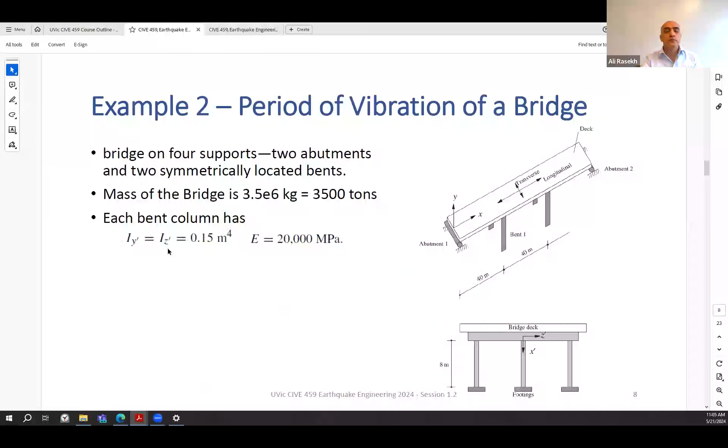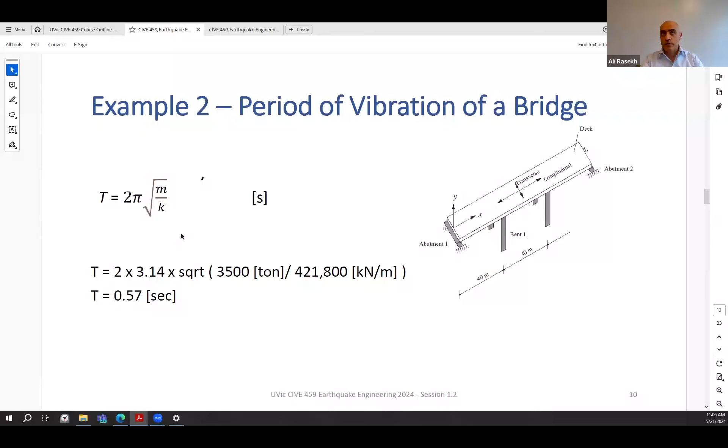Yeah, last Friday we were working our way through some examples here, and I go to almost where we left off. We went through quite a few good examples on estimating stiffnesses and masses of the system and coming up with the period of vibration of the system, such as a bridge here. We did very good examples here to review our general knowledge of dynamic characteristics of the system.

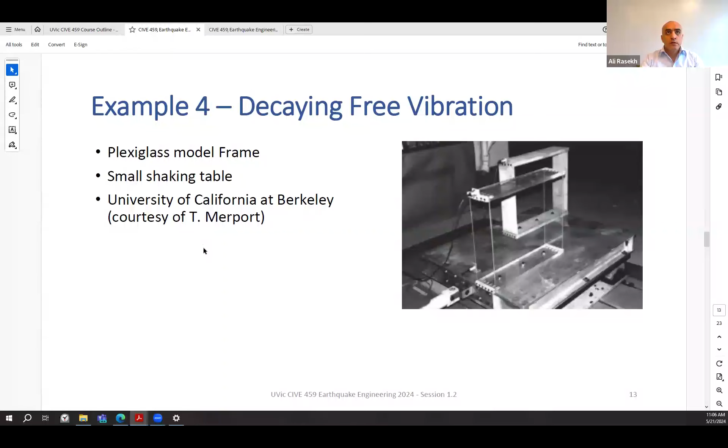And we checked decaying. Let me put this microphone here. Sorry, slightly different setup here because I'm at the office.

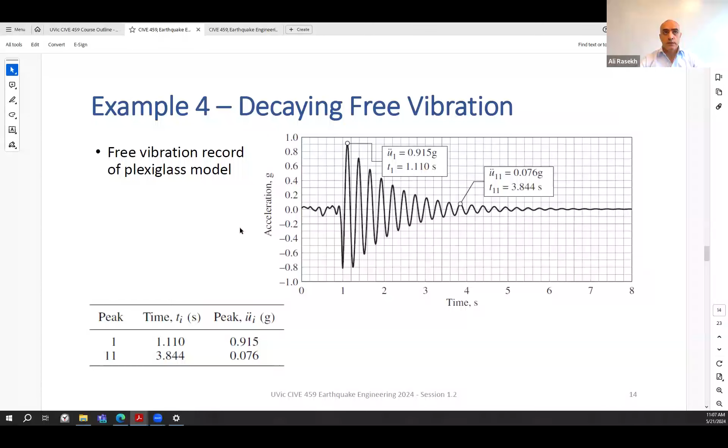Okay, so we discussed the decaying free vibration, and we could estimate very quickly. That was a nice and quick way of checking the period of the system and damping of the system. And we went through the steps, and period was just seeing how many vibrations we had and in how long a time, and the ratio was the period of the system

estimated at 0.273 seconds. And for damping, we had this solution that I previously introduced to you based on the logarithm of the change in amplitude. In this case, we have acceleration amplitude. Similarly, we could do it with deflection amplitude. And the change in acceleration amplitude, that ratio, we could use it to assess the damping of the system.

Now we want to use a slightly more advanced solution, which a lot of times results in a more accurate estimate of the damping of the system. We previously introduced this method. It's called the half power bandwidth. Again, this is a shaking table, so this is like an experiment in a way on this particular type of structure and material. Material is plexiglass and the frame is built out of it.

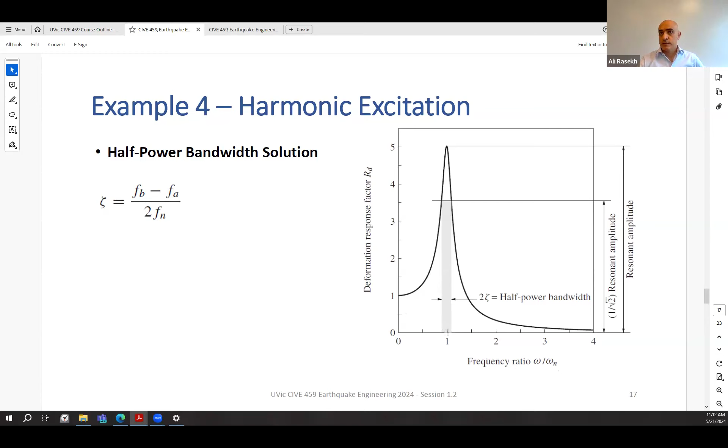So in this plot, the frequency is normalized with respect to natural frequency. Therefore, the middle point is 1, where frequency is the natural frequency. But you could also not normalize it, and that leads to the same outcome in a way.

So going through the exercise, the highest amplitude was 12.8 for the acceleration ratio, and divided by square root of 2, we got 9.05, the other straight line, and we have FA 3.44 hertz, FB 3.74 hertz, and the maximum, which might not be exactly the average, is 3.59. And therefore, we can estimate the damping: the difference between the upper value, FB, and lower value, FA, divided by twice the natural frequency. It gave us an estimate of 4.2% for damping ratio.

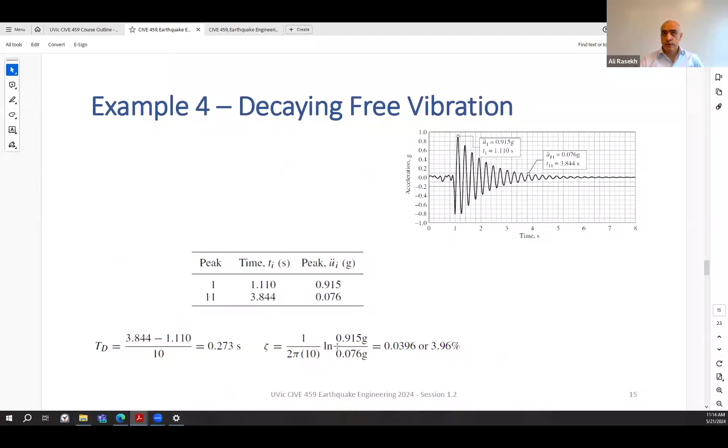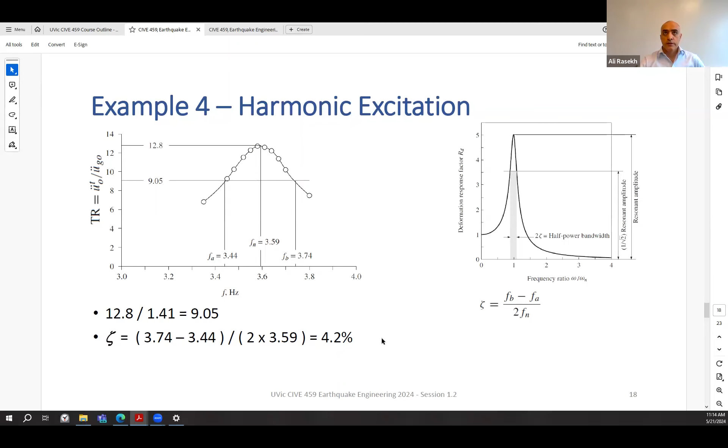So the previous estimate, how much was that with a simpler solution? We got 3.96, almost 4. And now with a more accurate solution, we are getting 4.2. So they are kind of in agreement with each other. However, the second solution is considered a better solution. And as I previously told you, this solution is applicable both to numerical studies and to experimental studies, such as what I showed here. That's about the half power bandwidth.

Second of inertia. A second, I should admit one more person.

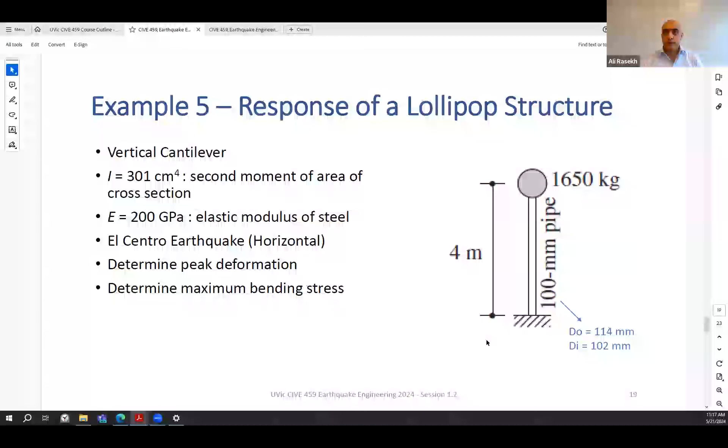Going to the next page. Again, this is a kind of equation you can find on the internet or ChatGPT, but you should generally be aware of it and be able to verify the correctness. So when you have a cantilevered beam, the coefficient is 3, but if you have a column which is prevented from rotation both at the bottom and top, it becomes stiffer, and the coefficient, I believe, is about 12. You should generally have the knowledge and know the resources, but sometimes when we are forgetful, you are welcome to use the searches.

And so the stiffness of such a column is directly related to elastic modulus and the thickness of the shape. However, when your length increases, the stiffness reduces. That's also some kind of engineering judgment. You can even feel that a longer column should be softer for lateral deflections. Going through the calculations, the stiffness in terms of force divided by deflection is about 28,000 newtons per meter, or 28 kilonewtons per meter.

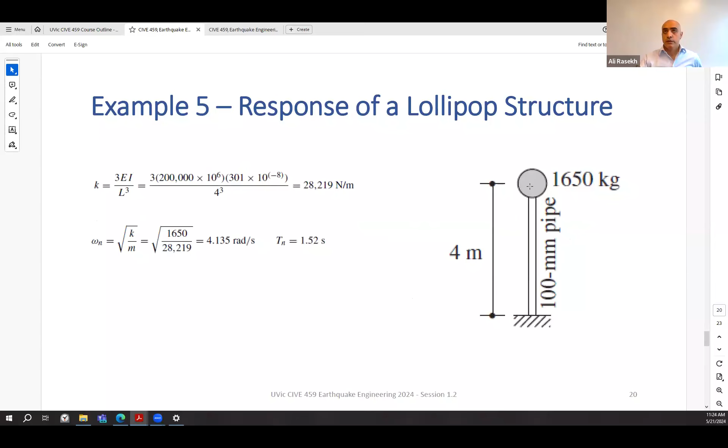One example is that if there are two structures side by side, we don't want them to hit each other. And we also don't want the structures to deflect too much, as it might cause lack of stability. Now, as I said, we have the peak acceleration in terms of g. So we multiply it by g, and we multiply by mass, and we get the maximum lateral inertia force that this structure will be experiencing during the El Centro earthquake: 3.5 kilonewtons.

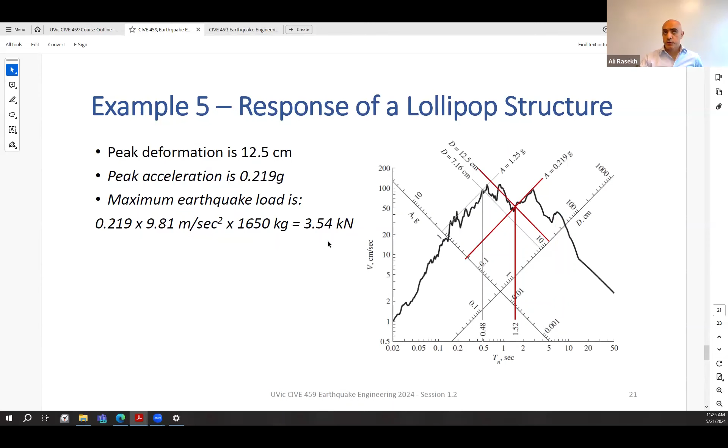Now again, back to the structure, 3.5 kilonewtons was the estimate of the load applied to the mass, because in an earthquake the mass actually sees the load, because earthquake is acceleration and it causes inertial forces in the mass. So the maximum force applied to this mass at the roof level, or tanker level, is 3.54 kilonewtons. And with your structural analysis calculation, you can obtain the maximum moment at the base, force multiplied by the arm, 14.2 kilonewton meters, and you can obtain the bending stress.

This is again from the structural analysis courses you previously had: for a circular section, or any section basically, if you have the I and the maximum distance to the edge, in this case the radius, you can calculate the maximum stress. So the maximum stress that this steel pipe will experience during the earthquake would be about 270 megapascals, which could be used in the design checks, comparing with the steel capacity.

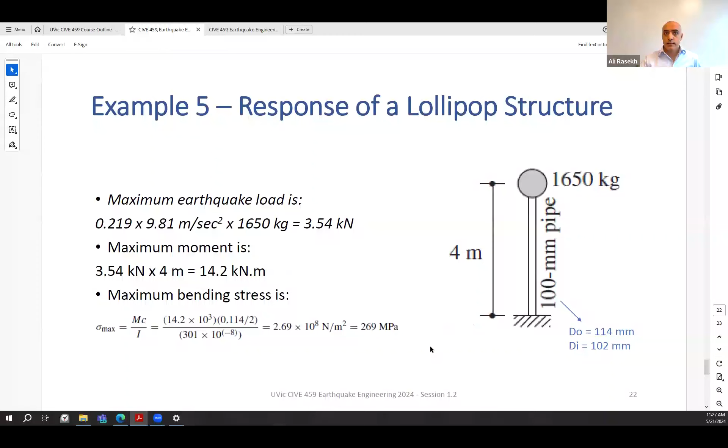And all different types of steel have the same elastic modulus, but they have different yielding stresses. This could be probably okay, or close to okay, for some of the building steels. You should also look at your specs. But it doesn't look like too huge a number. A steel from your steel book is probably about 350, but this could be even higher strength. So it looks like a pass. Any questions on this slideshow?

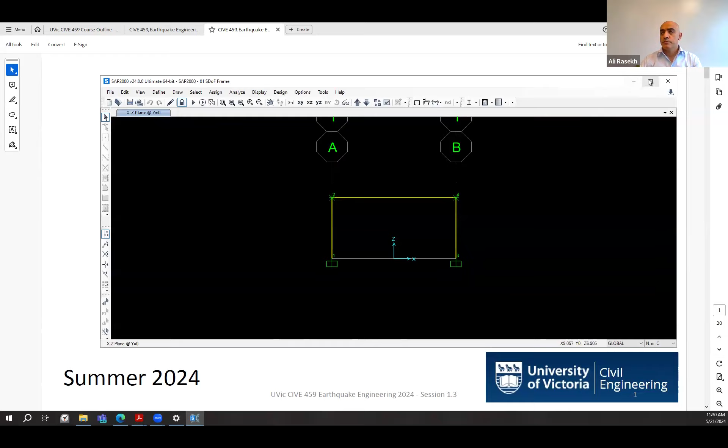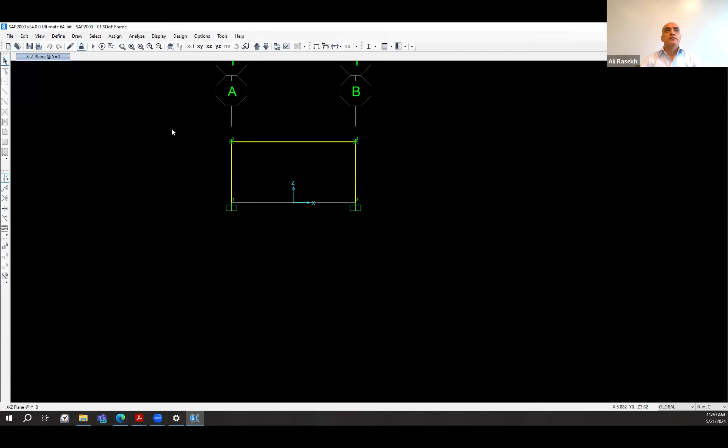Yeah. Opened. So we have a SAP 2000 model. Generally, I'm hoping that you guys have some experience with SAP 2000, but it's one of the best softwares for self-learning. Even sometimes I don't use a feature for a long time and I want to relearn it. Excellent videos and YouTube links and knowledge base links that explain everything. So I'm not seeing any issues with learning the software and using it. However, we go through a dynamic case in this session.

SAP 2000, single degree of freedom. Yeah, the SAP 2000 model is what I just showed to you. It's basically a one-story frame with a height of 3 meters and length of 6 meters. It's like a portal frame, as we call it. And I have listed a few important tasks when you create a model. Be aware of your material and section. Material means that you have used a steel, and section means what section steel profile from your steel book or from the vendor, etc. You should know what the profile is.

In the last case we just discussed, it was a tube, like a hollow tube. So you should define your section as well, because most of our work is based on the frame assumption, meaning that the finite element solution doesn't discretize the section; the frame should be defined by its section, which is an excellent solution and very efficient for our type of work. Build geometry, meaning at a high level, what is the geometry? We have a 6 meter by 3 meter geometry.

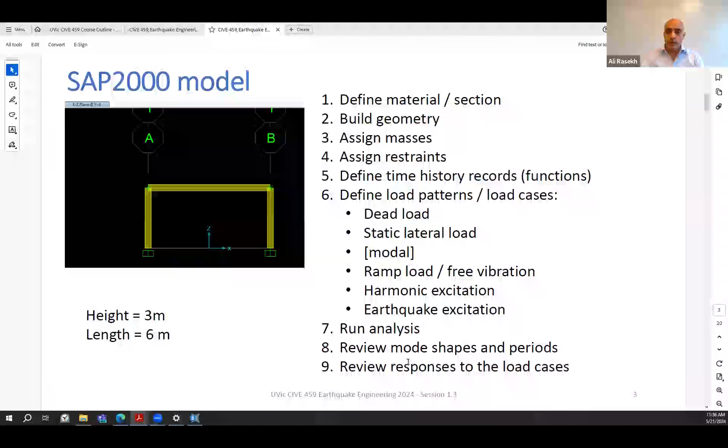So, as I said, sometimes we trivialize it, but it's very important that the material and sections be checked and double checked, like two independent people look at them, because if they are not correct, you cannot trust the outcome. The material was, if I can read it correctly, steel with a yield of 50 KSI. 50 KSI is almost the same as 350 megapascal. So that's the material that is used.

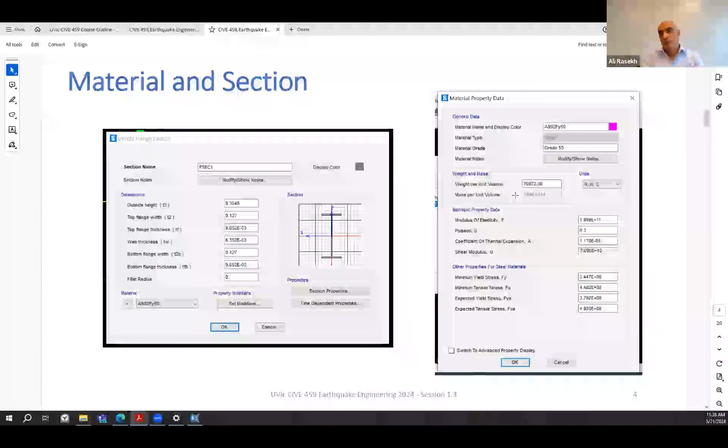However, we are not going nonlinear, so specifying the yield is not super important. But we have the awareness that most of the steel that we use is grade 50, which means that the yield is 50 KSI. And if you change the units from imperial to SI, which is, at least academically, more practiced in Canada, then you get about 350.

For industry, generally it's good to know both of them and be able to switch between the two, because in Canada there are still some imperial units, like the grade of this steel is called 50, which means 50 KSI. And because we all live very close to the US border, there is a high possibility that we work on US projects as well. But it's trivial. Therefore, I recommend reporting in the standard SI definitely, but be able to understand the other unit system as well, imperial.

Unit weight in terms of kilograms per cubic meter is about 7,850, which is correct. And I'm looking at the biggest screen, but looks like the resolution is not perfect. So maybe next time I just keep it on my laptop screen.

Modulus of elasticity, again, as we said, 200 gigapascals, so about 2E11 for any type of steel. Poisson's ratio is given there, which is probably not used for our work, but it's in there. Thermal expansion, we are not using it. Yield stress, as I said, after changing to SI units is about 350 megapascal or 3.5E8.

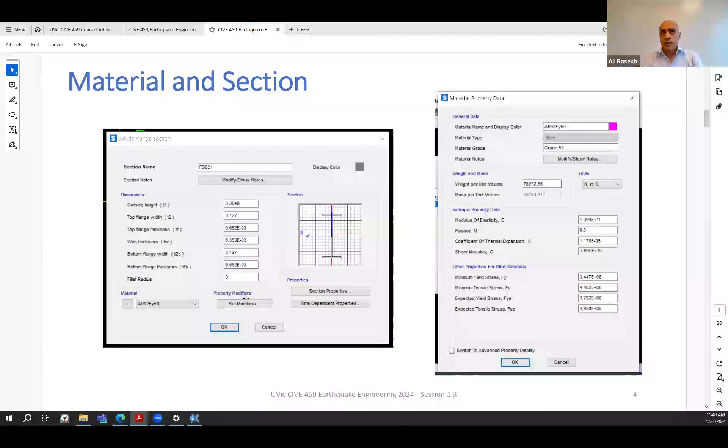Then we have this section, I section or W section, which is built up out of this material, steel, and all the dimensions are here. It says the material is grade 50, which was defined on this side. And you can have modifiers applied to it, but it would be more hidden. I don't suggest using hidden stuff that couldn't be double checked because it causes issues. Normally there's a table in most software where you can import the standard profiles. So probably that's what has happened in this case as well.

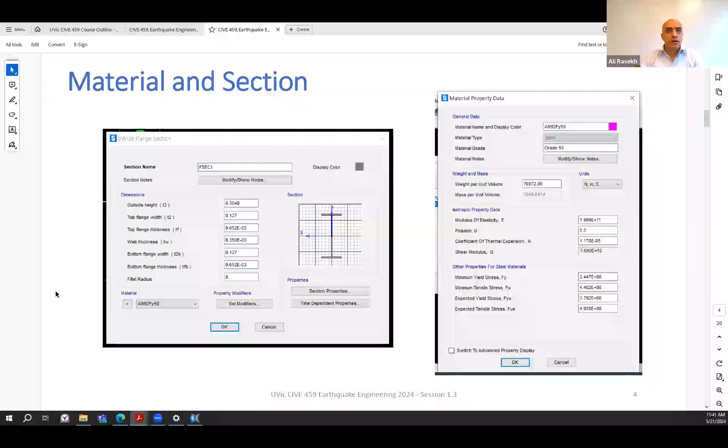And going to the model, if I can still find my way here, it's normally under define. You can define the material and sections. So we go to material, jumped into my other screen. And this is the grade 50 steel that we were looking at. So jumping to the other screen. So everything that I was showing to you is implemented in the model, and you have access to the model. You can scrutinize it.

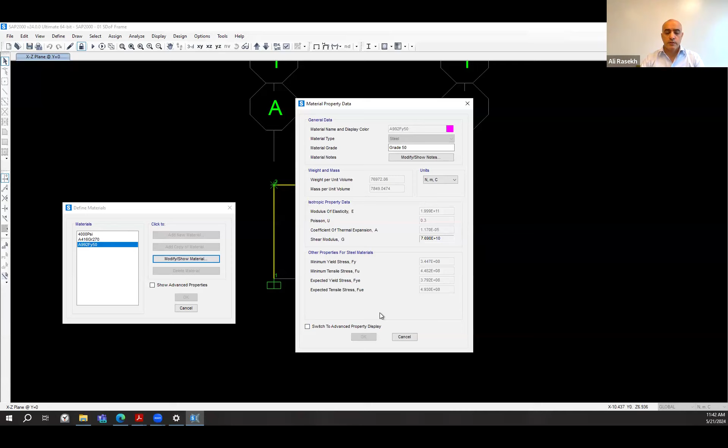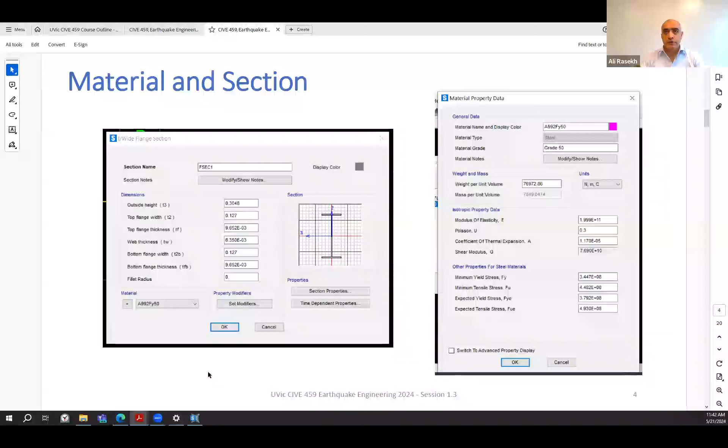Going back to the slideshow. So very, very important, always throughout your career, check the material properties and use the correct value for your project. Be very careful with your assumptions. Mass: it appears that in this case the nodal mass is applied, 20 tons total, so 10 tons on each node. That was the floor mass, which was probably concentrated there, and floor mass is a lot greater than the member mass.

So the program is showing it as directional mass because the program is capable of, for certain purposes, having only horizontal mass or only vertical mass, but generally for most cases, the mass should be identical in all directions, as in the physics of the phenomena. All masses are the same in all directions. Sometimes for computational purposes, you only want to apply it in a certain direction.

Okay, going back to the model. Sometimes you can right click. Okay. Bring it back. See everything assigned to every node. And as you see, the mass is in 3 directions and 10 tons in each direction. The unit is shown here, Newton and meter, and probably centigrade for thermal. Newton and meter correlates with kilograms, so the mass is in kilograms.

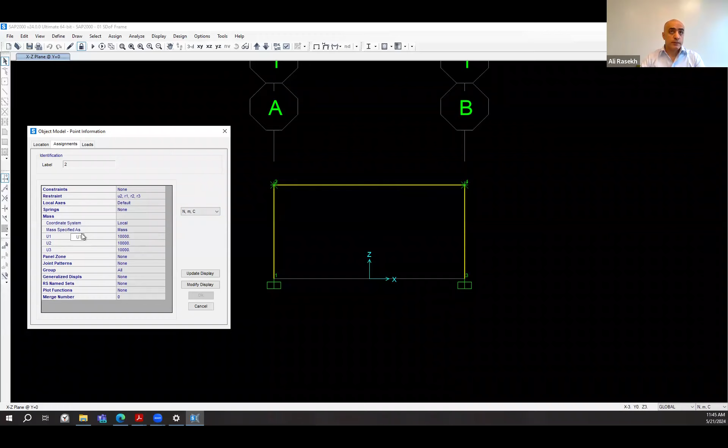Anyways, as I promised, I wanted to just slightly walk you through this SAP 2000 example, although there are very good resources on the internet. For many years, SAP 2000 has been the most important tool for structural engineers. So I highly recommend that you have some proficiency with this software.

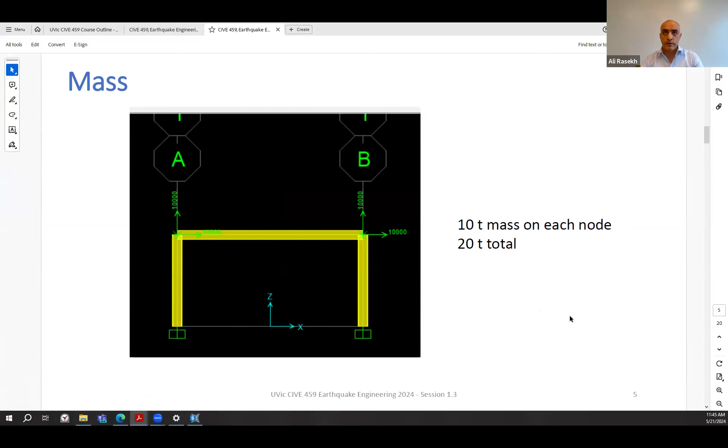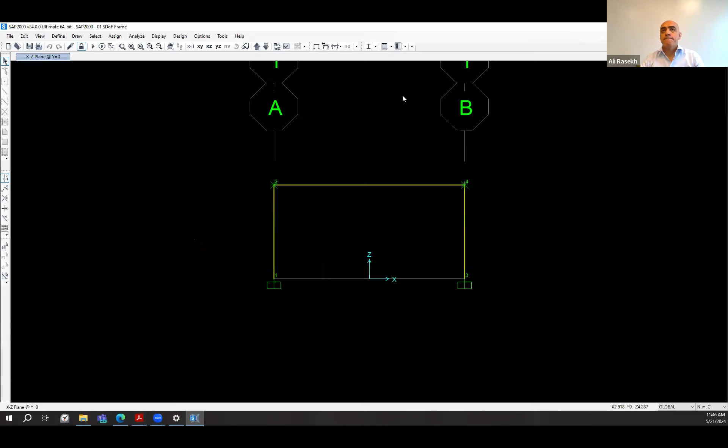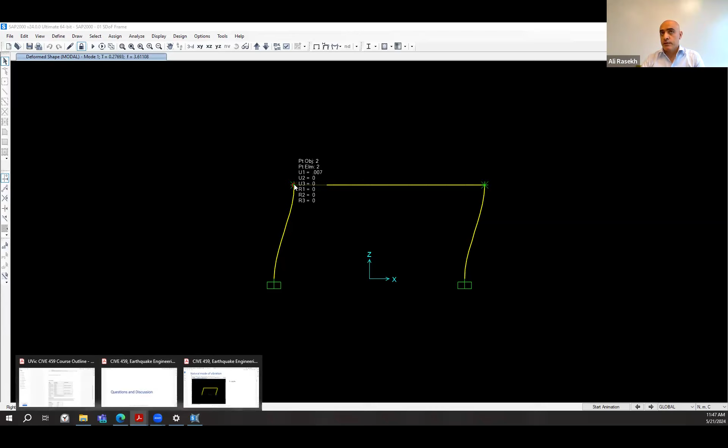As you saw, we didn't allow any rotation at this point or this point, which again should replicate the physical reality of the system. This was intended for a slab system or roof system, which is very rigid and doesn't really allow any deformation or rotation in the beam. But you can play with this, modify the restraint here so that rotation is allowed, then you will obtain a different frequency and different period, which is a good thing to play with.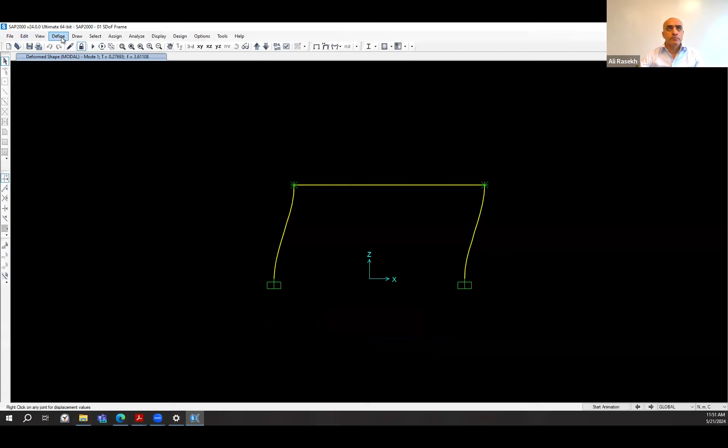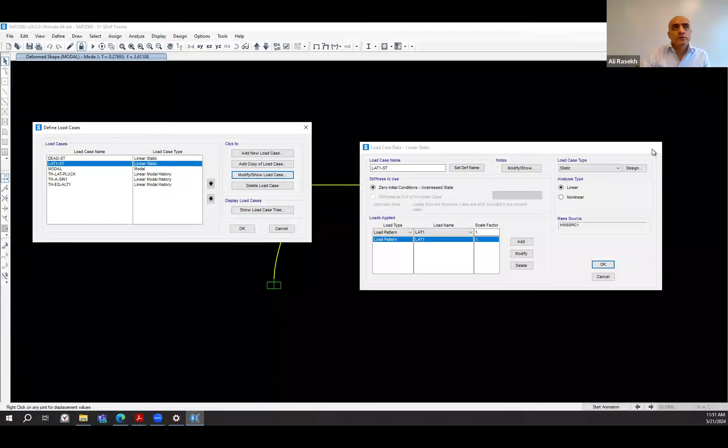Let me see if I can pull it up in the real model. Didn't we say load case? In the different load cases, we discussed probably this one, lateral load. And modify/show. Almost what we were seeing there. And this is a static one. No, we want one of the time history ones. So forget about this one. That's lateral under static. Lateral under dynamic is this one.

Yeah, exactly the same as those screenshots. And we already discussed a lot of these things. Mass source is mentioned here. Just pretty much every mass in the system should be used.

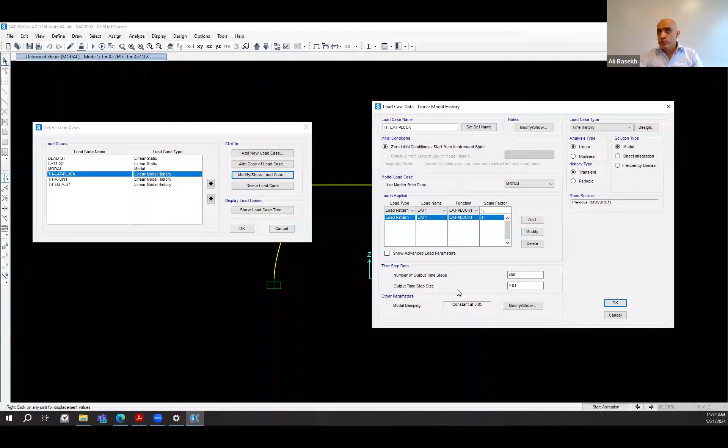Output time step is different than the time stepping for analysis. So for the analysis duration, we have said use 400 steps. That's the way SAP2000 works, that we should tell it the number of total steps. But sometimes in some other programs, we say we want this duration, and the time step should be, say, 0.01 or 0.001.

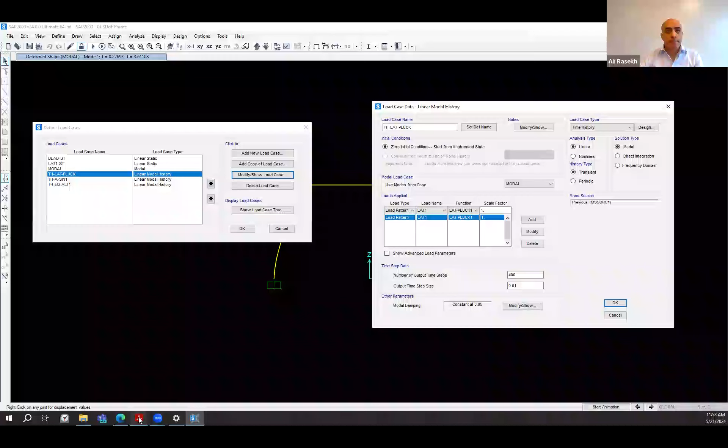Here, maybe something that I missed is the damping. So we have defined a constant modal damping of 5% on the system. So we are dictating 5% damping. Back to the slideshow.

Now, what are the outcomes? We can see those outputs from the model. This first plot is the displacement. This is when we were loading it, and then we removed loading and allowed it to vibrate and gradually damp out. So obviously the deflection is reducing and the energy in the system is dissipating. We have dictated 5% damping.

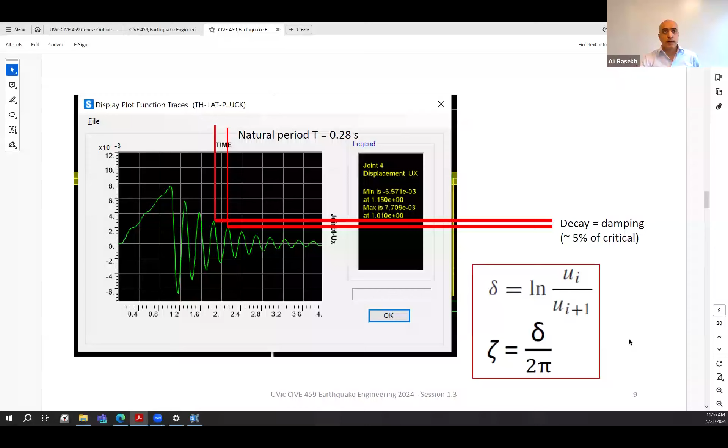And going through these steps should also give us a number very close to 5%. In this case it's trivial because we dictated 5% damping, so it should be no surprise. But it's a good exercise just to see you specified 5% damping and you can calculate 5% damping.

Okay, other questions? Not in the chat room. As I said, always feel free to open your mic and ask questions.

So a harmonic excitation exercise was also performed. Again, a time history function was defined, which is basically a sinusoidal load with a scale factor of 4. And most of the other specifications remain the same. The damping ratio remained 5%. Time stepping is also the same, but this is a longer analysis, therefore more time steps.

And the function that is mentioned here is defined as a sinusoidal function with a maximum of 1. I cannot see the period or the frequency of the forcing function. So it starts from 0, goes to 1 in 0.25. Oh, sorry. I cannot guess, but we can see what the frequency is.

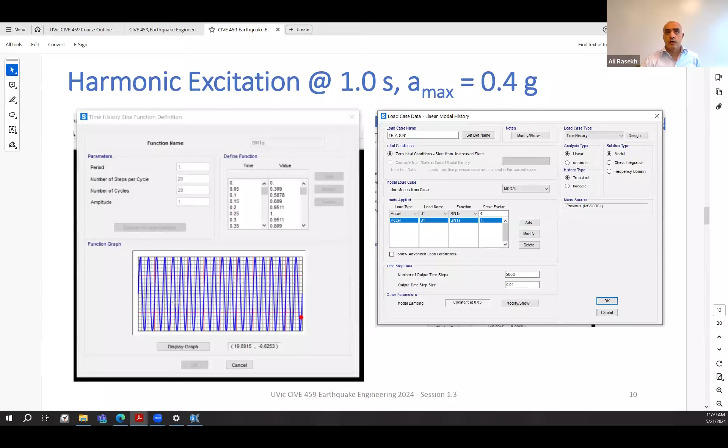Again, we apply that excitation on the system with a maximum value of 0.4 g, and the program is able to output the pseudo spectral acceleration as if this is an earthquake, but a very unusual earthquake, which is harmonic. So harmonic excitation can also have a pseudo spectral acceleration, but it has a very regular form.

And as we expected, this is a good exercise in getting the pseudo acceleration, because unlike an earthquake, where you have a lot of zigzags and ups and downs, you only have one peak exactly at the period of the system, which was 1. That's where the maximum excitation happens, the resonance happens. The program can produce that for different damping ratios. The lower the damping ratio, the higher the resonance. Everything as expected.

And versus, if I'm not wrong, the one on the right is the spectral curve for, okay, no, I almost forgot from last year. So the program allows you to zoom in on a certain location. So I zoomed in and I took the screenshot here. And so this is basically just focusing on this area.

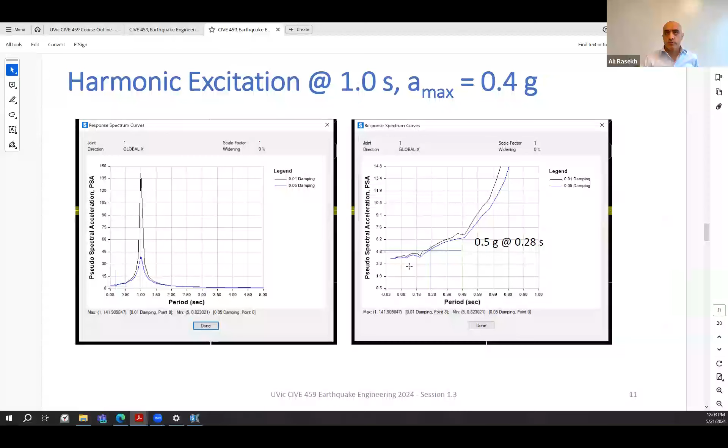Also, you can observe the maximum displacement, which is 10 millimeters. You can get it from the time history output. So basically, in a way, you verified the response spectrum solution. Use the response spectrum solution to get an estimate, but also read the results from the program.

Now, the most important solution that we will be using a lot, or maybe you will be using in your project as well, is using the real earthquake. So the real earthquake is also added there. If you see an error message there, this is an earthquake from the default SAP2000 records. Then you can point it to the folder in your SAP2000 where all the records are kept, and you can find that record, which is EQALT1, if you want to exactly repeat what we have here.

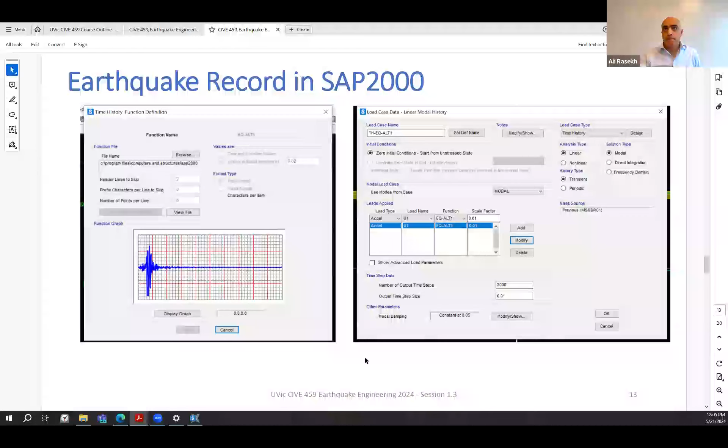Yeah, so I have included the typical data file. I expect you guys to just open it and look at it as well. Some digits showing the specifications of the earthquake. However, you know that the earthquake record is in 8 columns. You can see that. And the time step should be mentioned on top, which is 0.01 second. The unit, which is centimeters per second squared. So you should be aware of that.

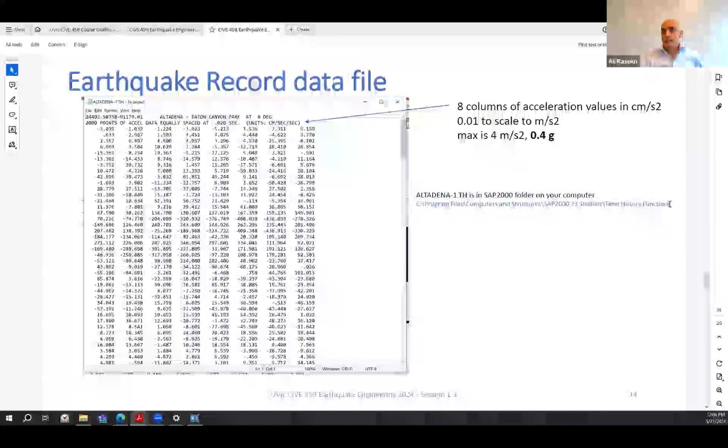Then you use a multiplier of 0.01 because the unit of your analysis is meters. And the maximum value is 0.4 g in this case as well. All right. And the location is this folder on your computer. So if you are seeing an error message after downloading my version onto your computer, if the program cannot find the function, you can point it to this folder.

Again, you can have the program create a spectral or pseudo spectral acceleration. As we previously said, pseudo spectral is even more popular than spectral, or Chopra argues that pseudo spectral is a better tool as well. So although we forget in practice, we should be using pseudo spectral more. But sometimes we alternatively use spectral acceleration or pseudo spectral acceleration.

This is shown for 1% damping and 5% damping. Obviously, 5% damping is lower. It's damped more. And again, zooming into this area that I have shown, for 5% damping and a period of 0.28 second, we expect a response of about 1.3 g.

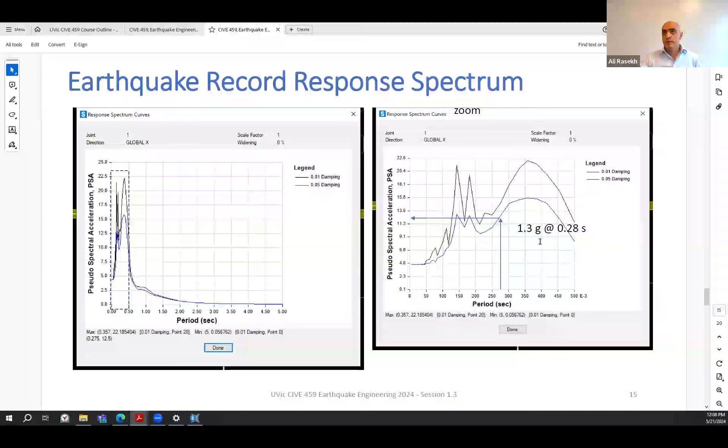And the more correct time history analysis appears that it has given us 1.1 G. So the response spectrum solution is normally, we consider it to be more conservative. So it gives you a higher value, while the response history analysis or time history analysis is more correct in a way. So this is the more correct solution when you read the response from the program. The maximum acceleration in the system was 1.1 G.

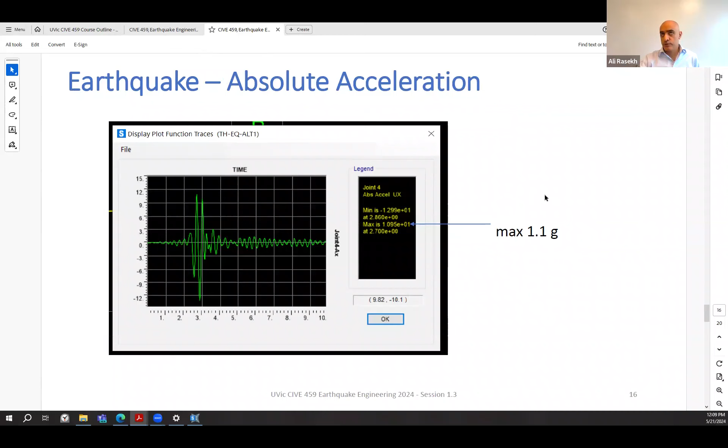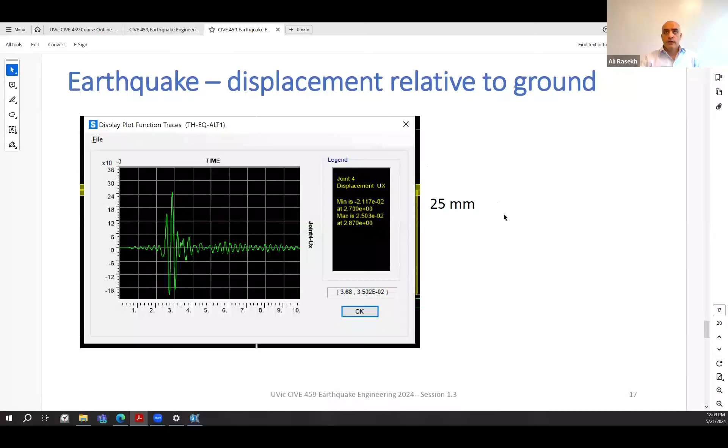Deflection is also important. And here I emphasize absolute acceleration. So absolute acceleration should be used in design rather than relative acceleration. Displacement, normally we are interested in relative displacement or deflection. How much the top of a structure deflected with respect to the ground. That's the important factor for design. And that has been 25 millimeter in this case. The program output base shear of 260 kilonewton, which corresponded with 1.3 G.

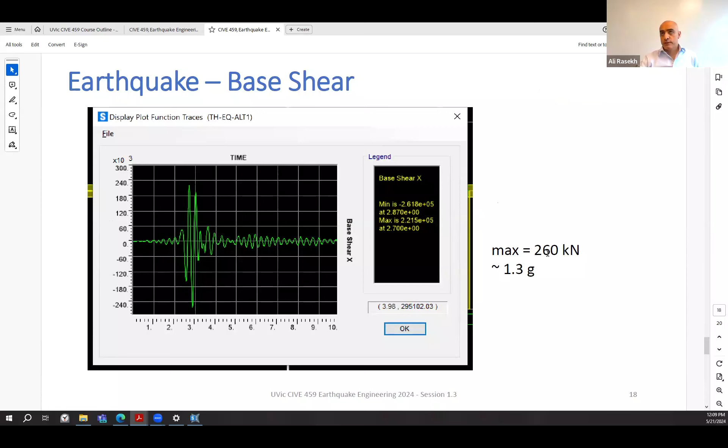And the acceleration, top of the roof of the structure, base of the structure, there is amplification. So the roof is seeing a lot higher acceleration. Yeah, that's the same 1.1 that we discussed. So the roof level acceleration is, as we expect, higher than base excitation. Yeah, that's it. So that's a very good exercise to refresh your knowledge of SAP 2000 and also, just by playing with the software, fully understand the concepts that we were discussing so far.

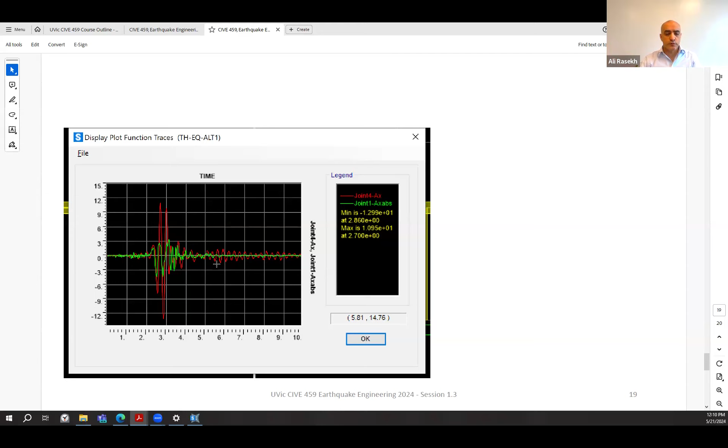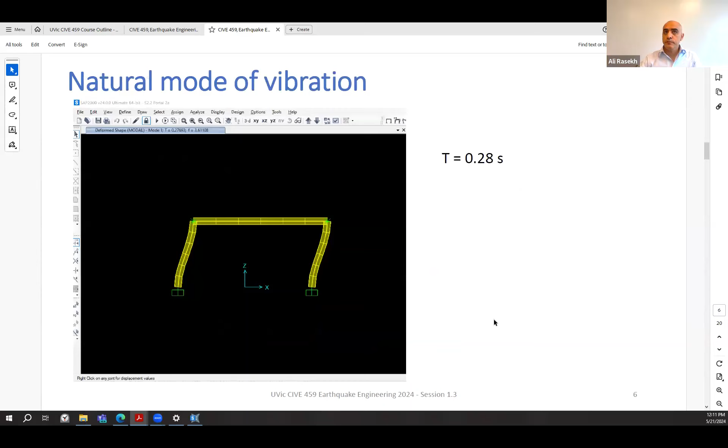Now, questions about SAP 2000, 1D analysis, 1 degree of freedom. We should call it, it's a 2D, but 1 degree of freedom. That's what we showed here. So this is a 2D structure, but practically we allowed it to move only, like the top of the structure moves horizontally, and there is only one deflection to measure, which is horizontal deflection. So that was a 1 degree of freedom, while the structure is really 2D. Again, questions?

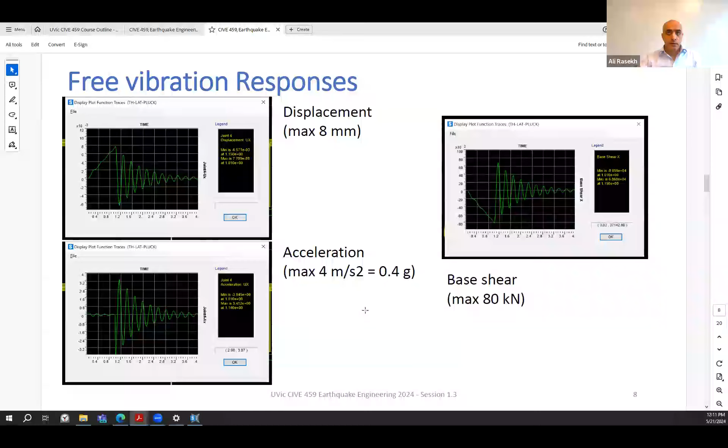I'm not seeing anything on the comment section. Well, I'm hoping that you guys are doing well with forming your teams, etc. Let me go back to this one. I have not really looked at it. Looks like it was working as far as creating the teams, but you said that you couldn't upload the, yeah, okay, I'm seeing some numbers here. Oh, beautiful. Looks like we have 8 teams. Excellent. That was an important step. So you can keep on using the same group number. However, I will reach out to, okay, hopefully 10 more minutes on battery.

Well, let me see if I can reduce the demand. Not transferring the screen sharing anymore. You are seeing me. Anyways, the question was more important. I don't know how I missed that one. Zoom meeting. Okay. Already, let me go to the chat. Yeah.

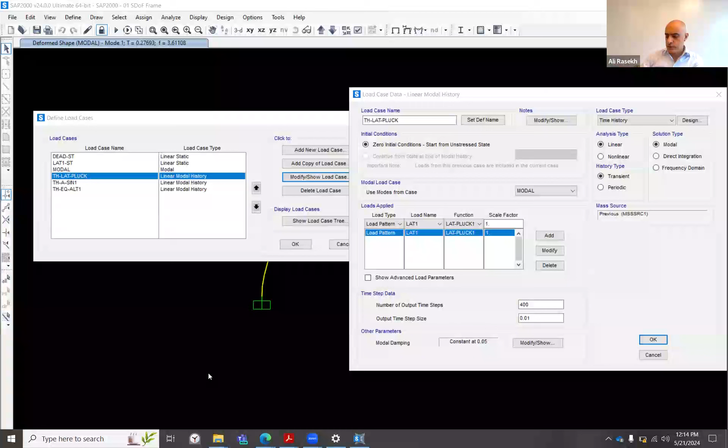How to access the educational version? Or isn't it working? You should call your IT if it's not working, because normally you should have access to that. Yeah, let me write it down. So I think it's related to like you have a license, which is not even exactly educational. It's related to UVic registration. You should be able to download it and use that license. So contact your IT and I will remind them that for this course, you guys should have access to the license. Maybe it's not the latest revision of SAP 2000, it's like one of the last versions.

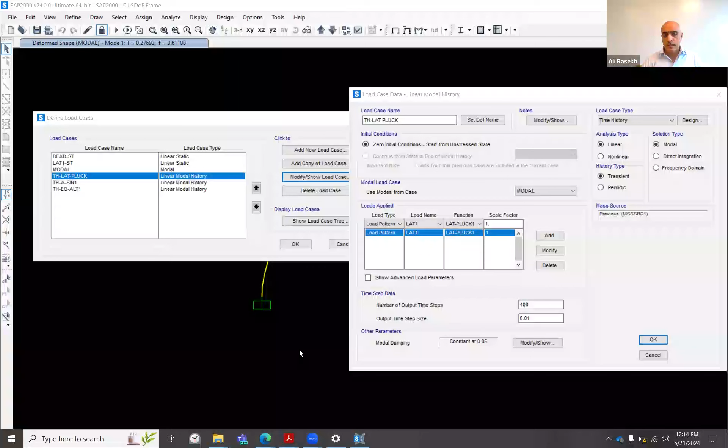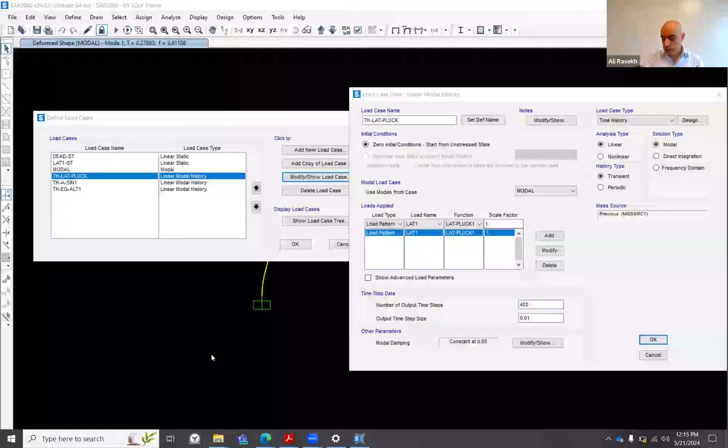Did I answer your question? So I think you should do it through the UVic system in a way. Access the license through UVic. Maybe you should use VPN or those kinds of solutions. But your IT, I will email them, and when they tell me, I will just broadcast it one more time. Other questions? Hopefully I answered the recent questions. So we have an issue with SAP and an issue with uploading the work plan. And we had one typo. I should fix that. Yeah, feel free to ask your other questions.

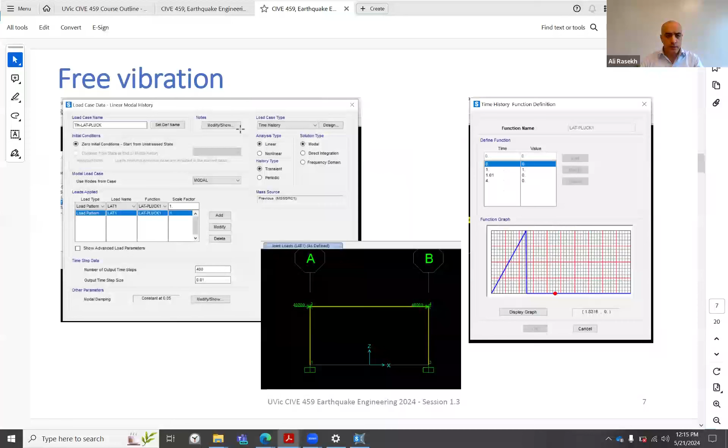This is trying to have a preview of what we do next time. No, 2.1. So it's module 2, which is multi-degree of freedom. That's what we want to do next time. Or starting at this moment, maybe we can look at it for a few minutes if you guys are not asking questions, so that you know where we are heading to.

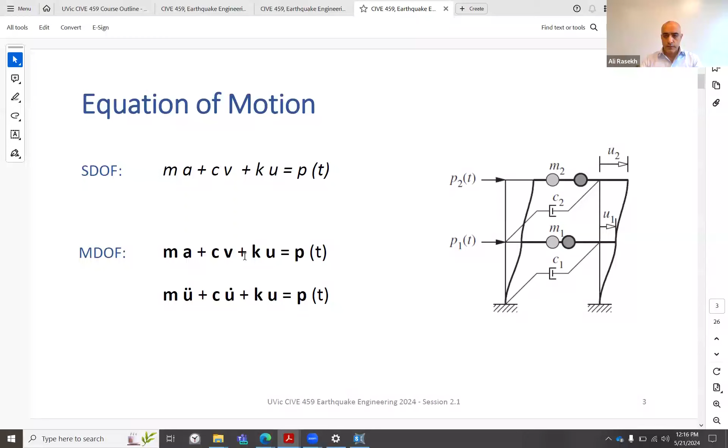We want to move on to multiple degrees of freedom systems, basically something like a two-story building where you have separate masses on each story, and this could be simplified, but as low as a 2 degrees of freedom system, because the first floor and second floor are really acting independently. It's difficult, or impossible, to correlate it for a general earthquake. And we have talked about the equation of motion for single degree of freedom. For multiple